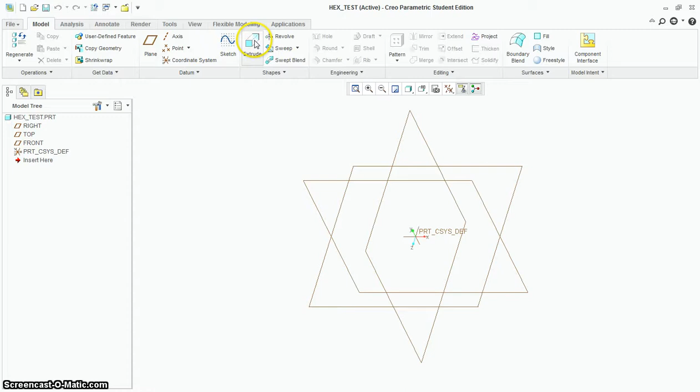Then click OK. Now it is an extrude, so we're going to click Extrude, Front, and Sketch View. You should be used to doing this now. This procedure is important, and I'm going to use a similar technique I did last time. I'm going to draw a line and dimension it, getting it very close to what it actually is going to be. So I'm going to make this 98.83.

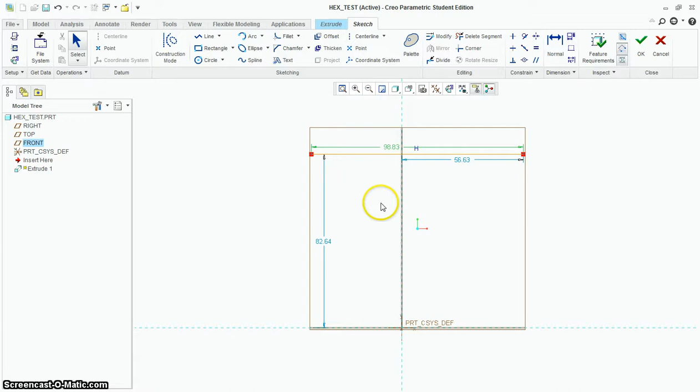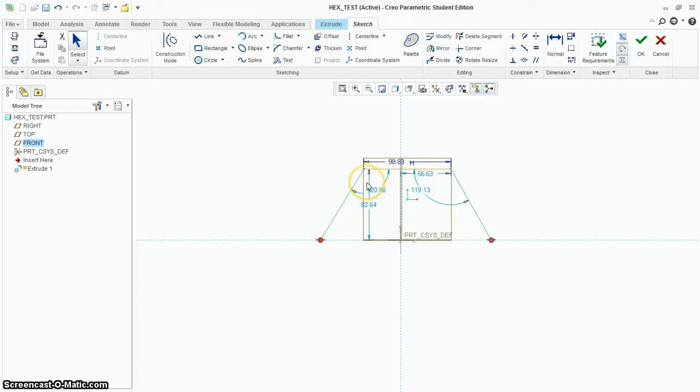Okay, and I don't need this exactly centered. We could mathematically center this if we want, but I'm going to rough out a little bit more of this shape. I'm going to put in a line down to here, and also a line down to here, and then dimension a bit more. By doing this step by step, it can be fairly difficult to dimension this drawing if you just draw the whole thing first, because everything ends up way different than it should be.

So what is this upper interior angle? Look at your paper, it's 125. Now these dimensions did pop up. If it didn't pop up, you can add a dimension anywhere you want. This dimension right here, I don't know what that number's supposed to be, so you just ignore it. You don't have to know all the numbers and what they're supposed to be, it's okay.

So we're going to go to the dimension tool and say, from this line to this line, click, middle click, and it'll add that angular dimension in there, and that's also going to be 125. This drawing is symmetrical both vertically and horizontally.

Then what else do we know about it? Well, we know this is 150 in length, and we know this is 150 in length, so don't make that 150 — that's the height, from where this line starts on the y-axis and goes up on the y-axis. That's not the length of this line. So we need the length of this line, or if we made a triangle out of it, we'd call it the hypotenuse.

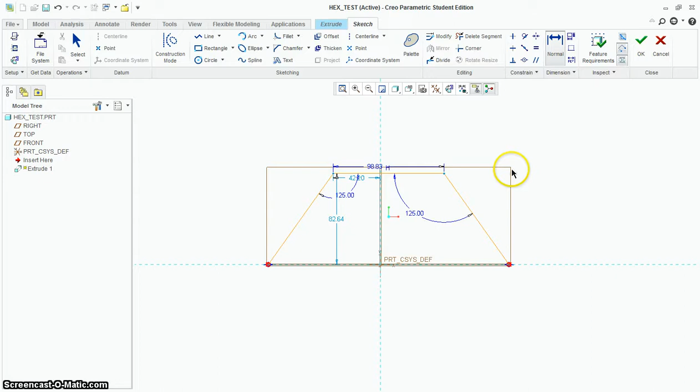So we're going to go to our dimension tool, click on that line, move your mouse out kind of perpendicular to this line, like we're making a T on its side, and middle click out here. That'll give you this aligned dimension, and this is 150. Now this might be 150 already, but I'm just going to double check it. I'll go to my dimension tool, click, middle click — yes, 150.

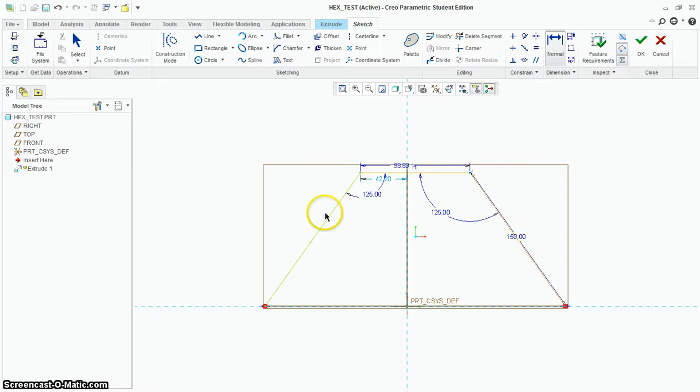Now it's not going to let you keep that dimension, because it's saying hey, you got a conflict here. If we let you change this number, something else will have to change — this will no longer be horizontal, or this won't be 150, or this can't be 125 degrees. So we just confirmed it's 150, that's good, so we're just going to delete that.

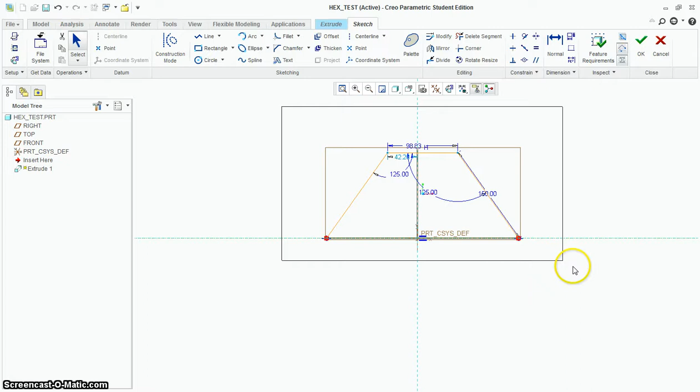Now here's something cool about this. This drawing should actually be perfect, okay? So if we want to mirror this, this is actually a cool tool. You do need a center line to mirror, so I'm going to put in a center line horizontally across the middle of this hexagon. I'm going to highlight my entire drawing, the top half of the hexagon, and then go to my mirror tool up here at the top.

Now if you read the bottom, it says select a mirror line, so that's going to be the center line for us, and you can see it mirrors it down. Now, before we say okay, it's done, let's go ahead and check this angle right here and confirm that it's 110.

So get your dimension tool and click on this line, middle click — yep, 110. It's a good way to confirm, but it's not going to let you keep this number here because it will conflict with other things you've done. Now, this is only true if you mirrored it. If you drew the whole thing, it probably will let you keep the 110.

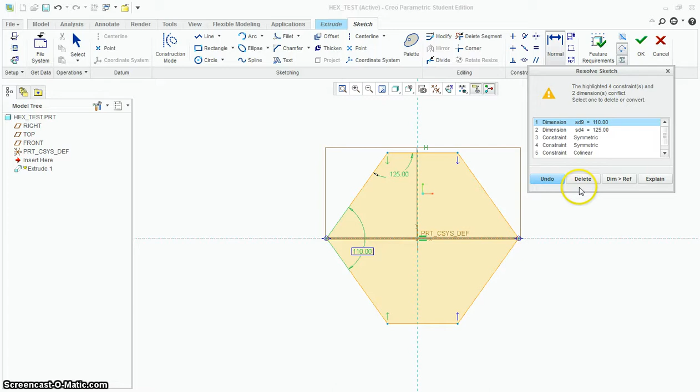So we accept it, there's our shape. We pick the thickness that we want — I'm going to make this one thin. And you accept it and save it. And that is the hexagon.